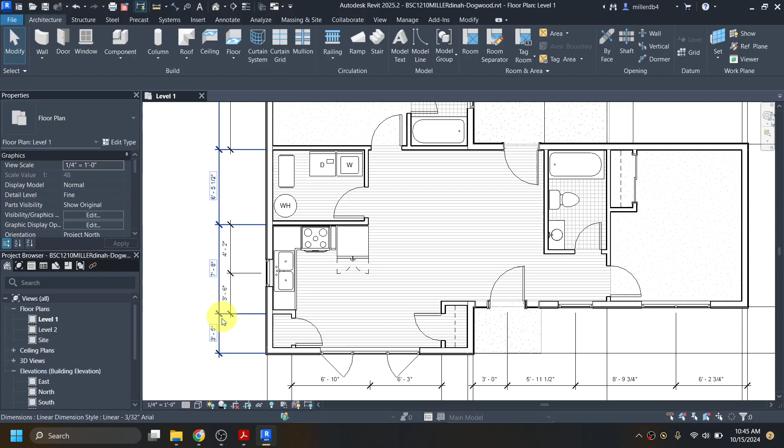One piece I wanted to note before we get into all of that is some of our components may need to be shifted from when we adjusted our dimensions. So you'll notice with my kitchen, mine didn't get all too bad, but my countertop is kind of stuck in this wall and not flush up against this wall, and the same thing with my cabinets. One easy fix for that would be to use the Align tool, which is keyboard shortcut AL, or if you click on anything in your drawing, it'll pop up right here.

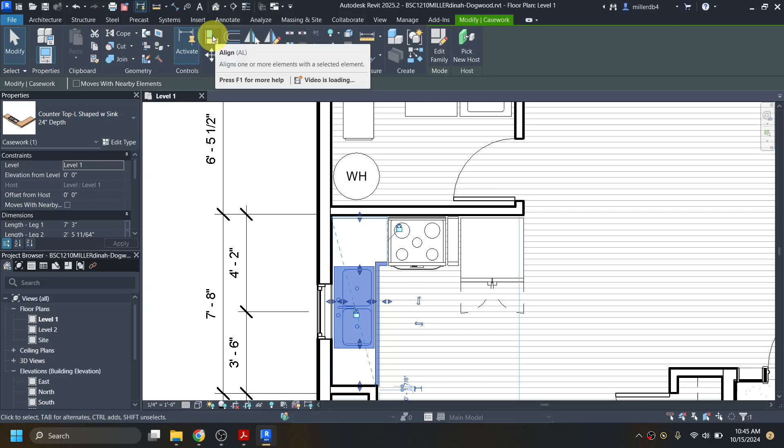I'm going to use AL, click on the wall, then click on the back of that countertop, and it's just going to keep it flush with it. I'll do the same thing with this countertop as well - the wall, then that countertop. And over on this side, the wall, then the countertop edge, just to keep them all flush with each other.

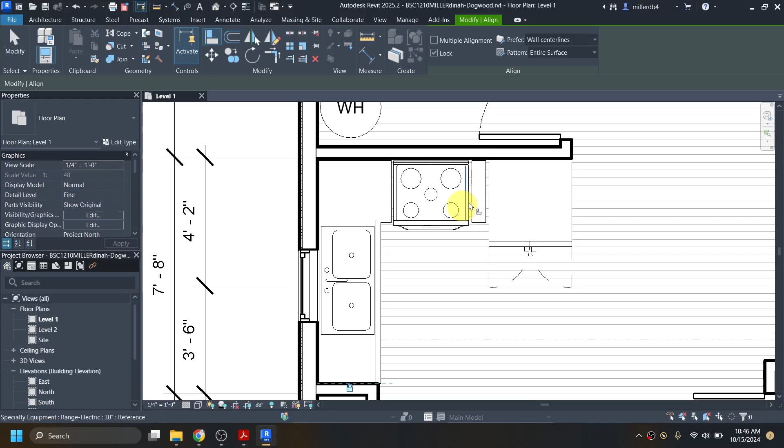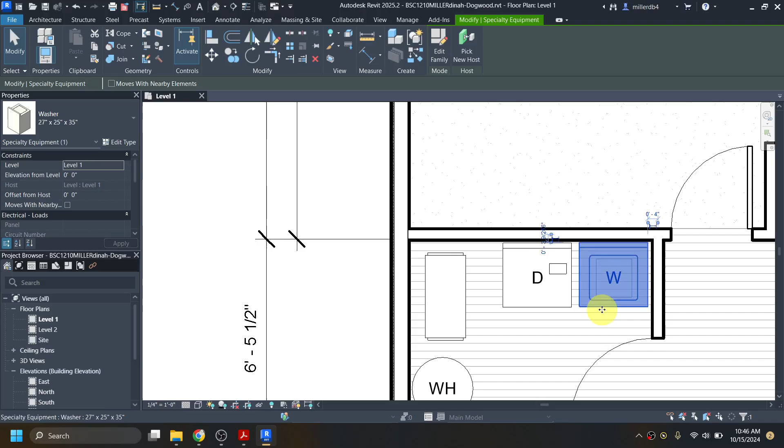Additionally, if I hit escape a bunch of times, we can also use our arrow keys on the keyboard to just move things into place. When you zoom in, it shifts things in smaller increments than when you're zoomed out. So if I move the washer zoomed out, it moves in big spaces, versus if I zoom in, it moves it little by little.

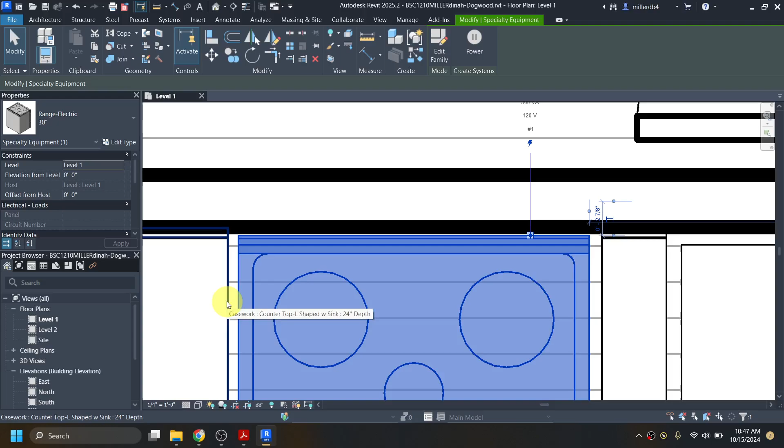With the washer and dryer, there's not really a set space we want to put them in, but things like our countertops, we want those flush up against the wall. Even though the stove doesn't necessarily go all the way up against the wall, I'm just going to eyeball it to be pretty centered here, which seems pretty good. I'll hit escape a couple times.

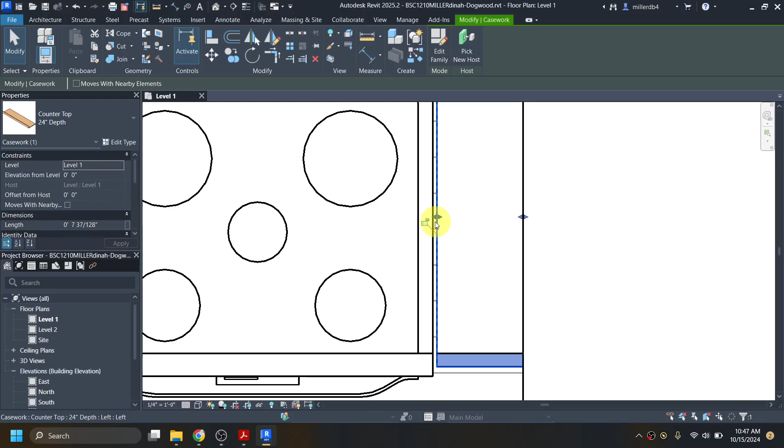I'm going to move this countertop and this base cabinet to just be a little wider too. I probably shouldn't put it right up against it now, thinking back to what I just did to center it. So let's click on it and shift it a little bit more this way. That seems pretty good to me.

Once I've got all of my dimensions and everything placed, the first thing I'm going to do before I make my section is start my foundation. Now, in order to add in a level for the foundation, we need to be in an elevation style view or a section style view - a view that shows a vertical view of the building. We don't have any sections placed yet, so we can't go into one of those.

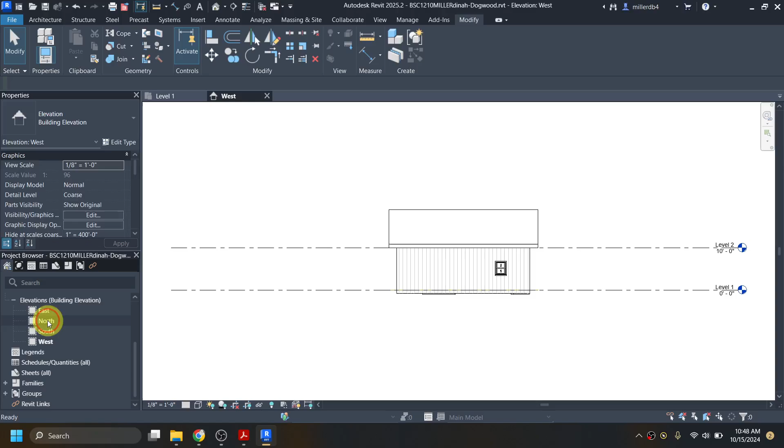To go into one of our elevations, the two ways to get there at the moment would be either to click on any of these arrowheads for our elevation views - if I double click on this arrowhead, it's going to take me into that west elevation. Or I could also come here in my project browser, go to my elevations, and double click. It doesn't really matter which elevation view you're in, you just want to be in one of those elevation views.

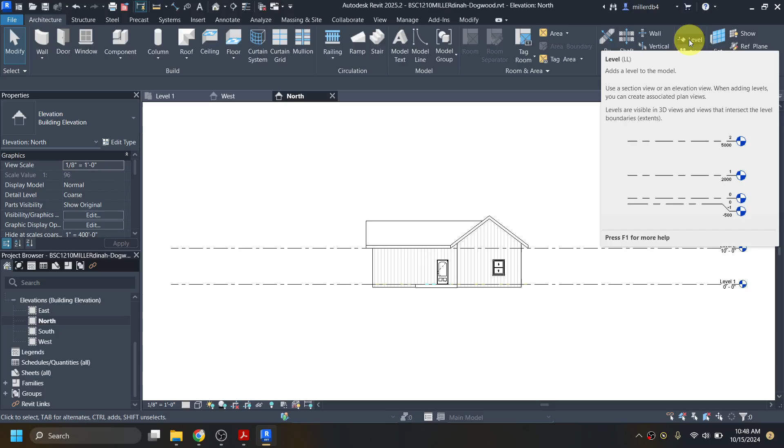Then to add a level, the keyboard shortcut is either LL, or in the architecture tab we have this button right here for adding a level. What I want to make sure it's doing, which mine doesn't seem to be set that way - yours might have this checked off - is we wanted to create a floor plan view for us while we add it in. So I'm going to make sure that create view is checked off. Then I'm going to click just somewhere aligned with the left side of my level heads. Doesn't really matter where or how far down.

So I'm going to click once, and then I'm going to shoot it all the way across until it's aligned up here. So I'm seeing that dashed line.

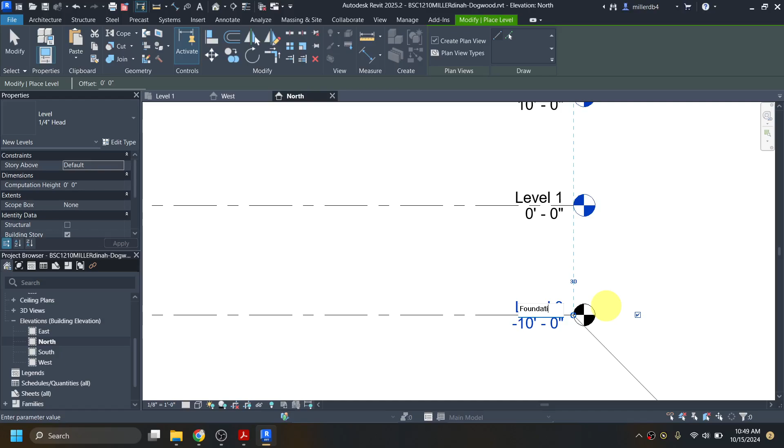Now by default, it called it level 3. I don't like that, so I'm just going to click on level 3 and rename mine foundation because that makes more sense. It's going to ask if I want to rename the corresponding view, so I'll say sure.

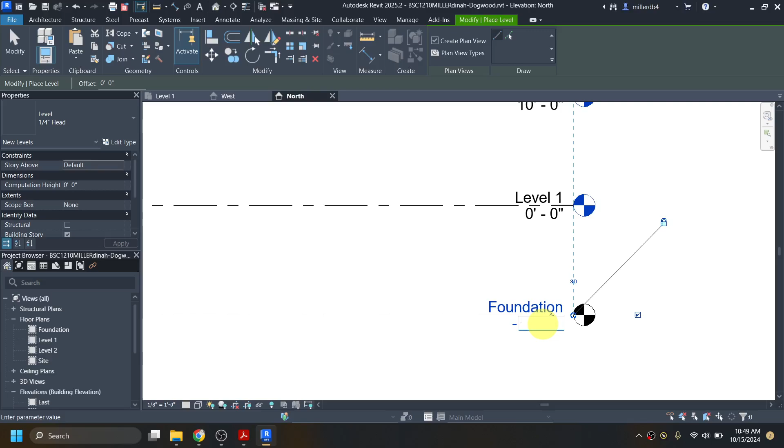And we'll also see over here in our floor plans, it's now made a level called foundation. I'm also going to redo this number from -10. It's not going to matter too much in this project. I'm going to say like -4 feet is how far down I'll put my foundation. And now we have a foundation view.

So I'm going to hit escape a few times. To go into that foundation view, I either can double click on it in my project browser, or I can even double click on this spot elevation and it'll show me my foundation view.

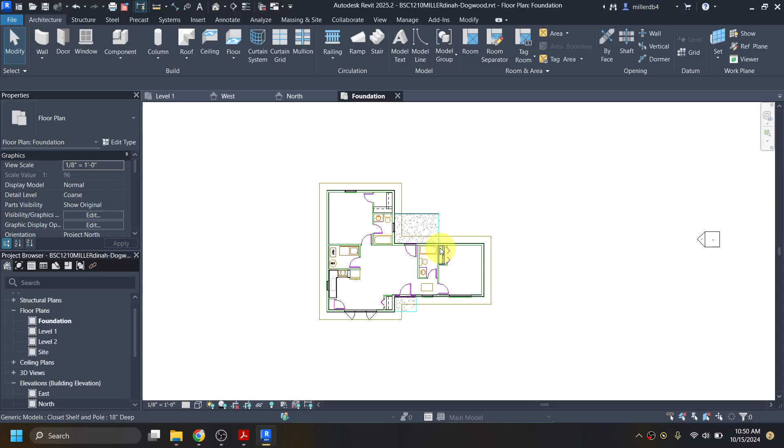So a couple of things we want to adjust within our foundation is we are going to, again, hide our CAD. So I'm going to click on that CAD, right click, hide in view, category, to make it go away. You'll also see it's showing me a lot more than I necessarily want to see in this view. In some ways that's helpful because it'll give us something to trace around for our foundation, and then we're going to adjust some of our visibility for it.

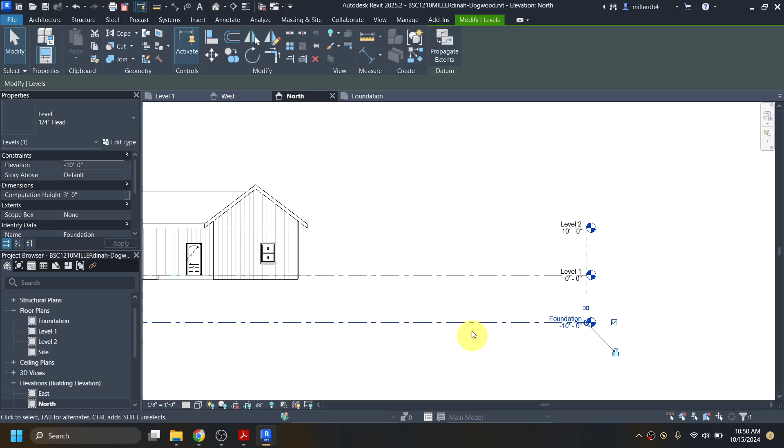Now, if nothing is showing up in yours, it could be the number you have this set at in one of my elevations. So if I have this set at negative 10 feet, when I go into my foundation, which I can get to here, here, or here, nothing's in this view at all. And nothing's in this view because I have my foundation set so far down. I have it set at negative 10 feet, and because my floor plan cut is at 4 feet above that, nothing is showing up, and that's why nothing's showing up here.

So if I wanted to keep it at negative 10 feet, which let's do it for this project, why not? Or if yours is at negative 4, you can keep it there. I'm going to adjust my visual settings.

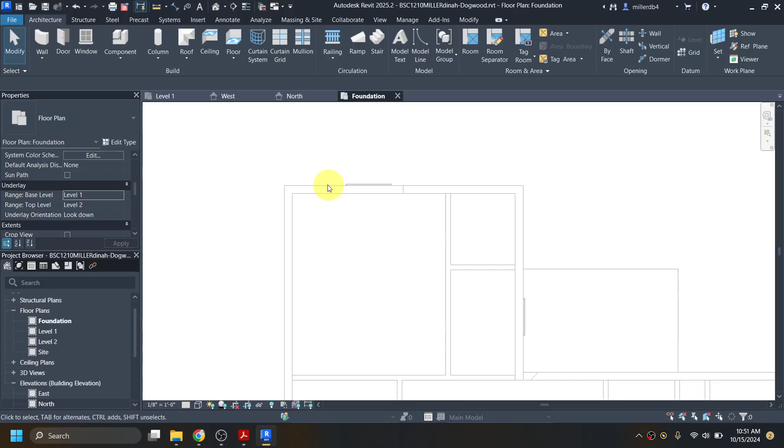And so I'm going to put a base range underlay of, I'm going to say, can you show me level 1? And then just move out of here. This is just going to give me something to trace around when I go to put foundation walls in here.

And so I'm going to start my wall tool for my foundation, which is going to be either just WA or wall right here. And I'm going to make my foundation walls out of this generic 8-inch masonry, because this is essentially a CMU here is what we're looking at.

Now, a couple of other settings I'm going to play around with in here is my location line. Last time we drew based off the center that we were tracing around. This time I'm going to say that I want to do it based on a core face interior. I could be wrong about that. We'll see in a moment.

And for my base constraint, I want it to start at my foundation level, and my top constraint, I want it to go up to level 1.

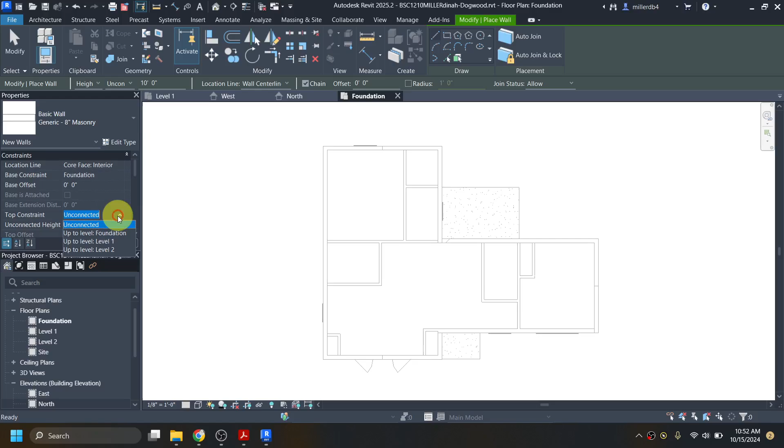Then what I'm going to do is just trace around, which let me hit escape once, because I want it to go to the core face, which I don't know if it's lining up there. I guess we'll find out. I'm just going to trace around to keep it flush with my sides.

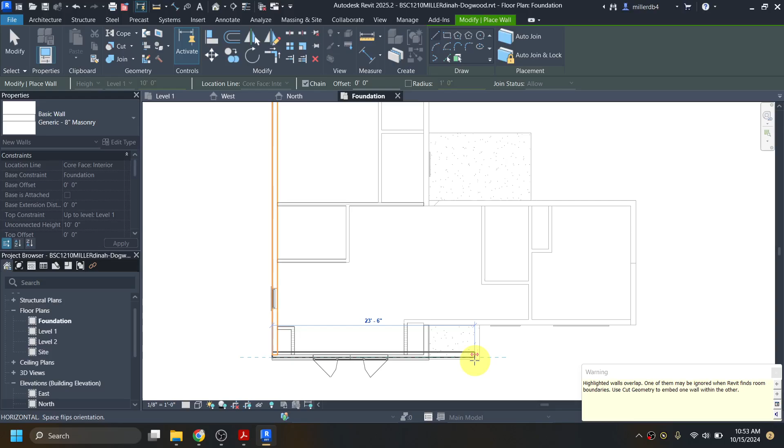And it's warning me that my walls overlap. There we go. Now I see that interior. Whoops, let me hit escape. For some reason, it's not showing me that.

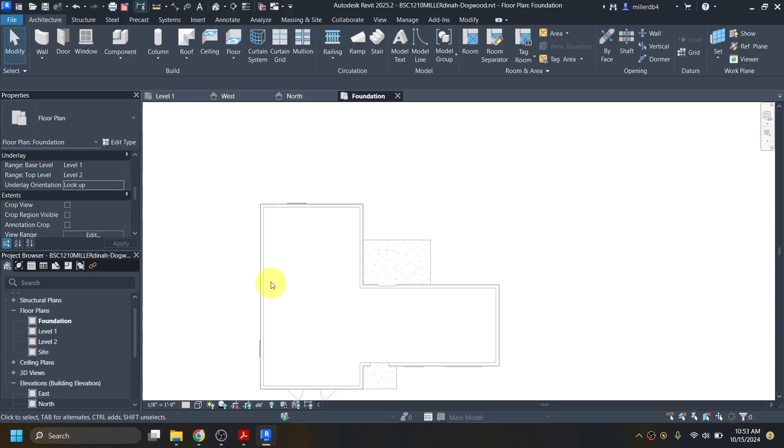What if I do look up for my underlay? There we go. If I change my underlay to look up, now I can see that core face that I want to trace around with. Don't worry about that warning popping up, it's just saying the floor and the walls are kind of glitching or interacting with each other.

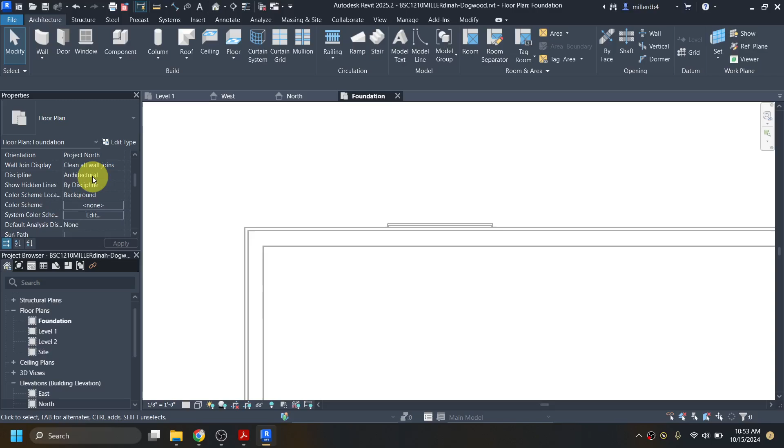If you have that wall here, unfortunately go ahead and just click on it and delete it. Make sure in your settings for your floor plan you've got it set to level 1 and an orientation of look up, because we want to keep it flush with this part of our wall.

I'm going to start the wall tool again and put it on that core face interior. You could also do core face exterior, and then trace around this way. We've got our base constraint of level foundation, our top constraint up to level 1.

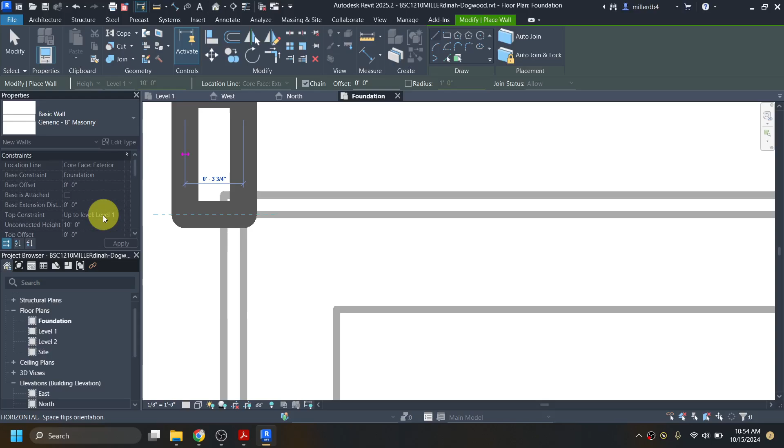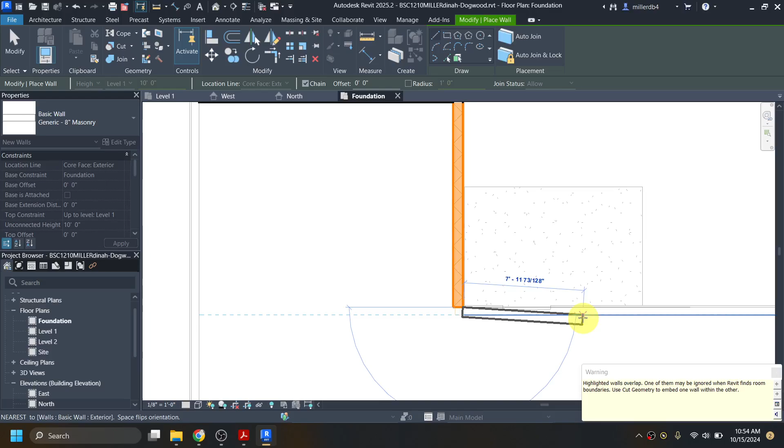We'll click on that corner to start, then go over to this corner. It's going to yell at me, so I'll go again. I'm just going to trace around my whole building, which sometimes requires stopping the tool and starting it again on some corners to make sure it's actually sitting flush. I'm just hitting escape once.

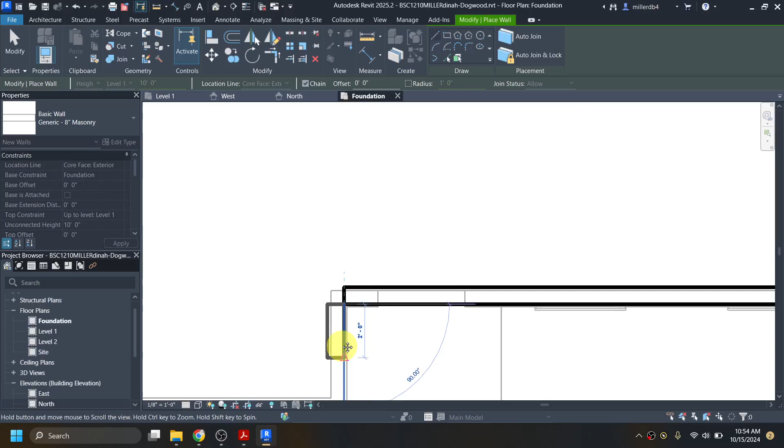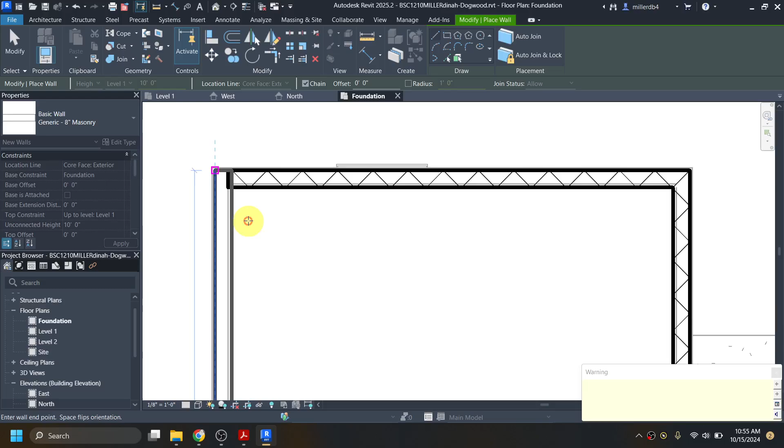These warnings are just letting me know things overlap, we're going to fix that in a minute. Click on that corner, to this corner, this corner, to this one. I'm also going to hit escape a couple of times.

I'm going to extend this foundation wall out, just clicking on that grip and pulling it. Let me click on this one and pull it to intersect as well. The way I think this foundation would be laid out and the way I think the building would get framed would be this part of the building and this part, so I'm making a little choice there.

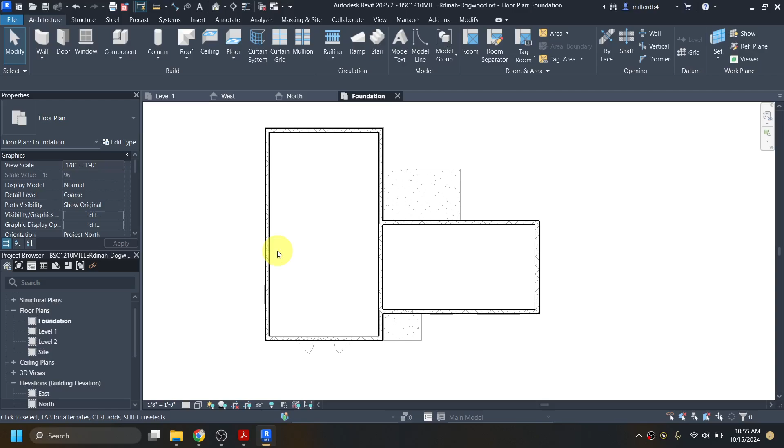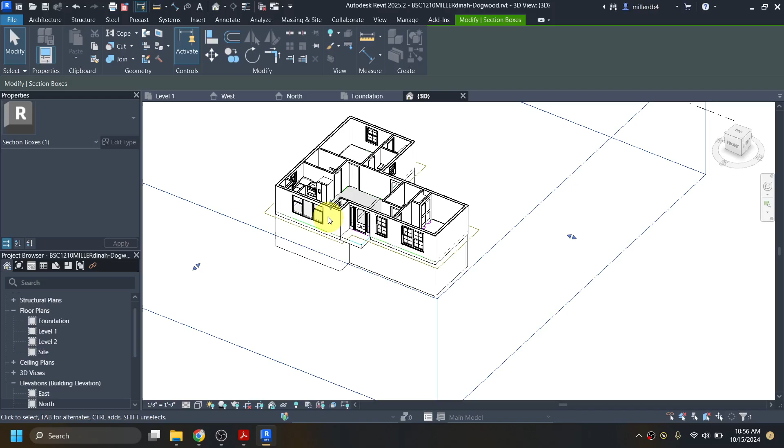Once I've traced around my foundation, I can turn that underlay off. I'm going to scroll down and set my underlay back to none. If I go look at it in 3D, I've got my section box on so only a little part of it is shown, but if I pull that down, we can now see that we have a foundation.

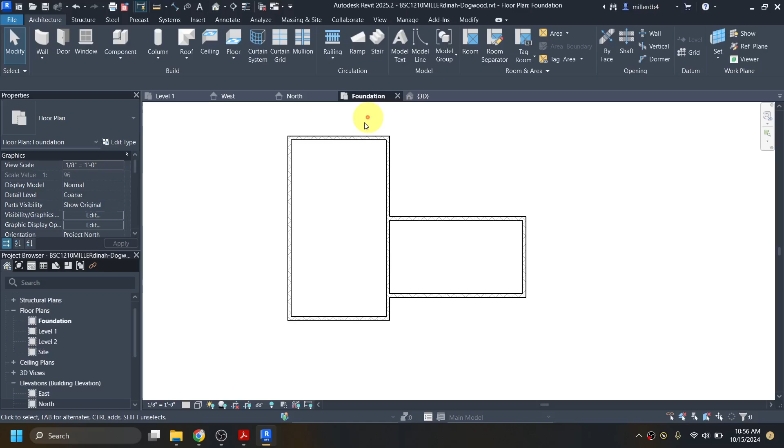What it was warning me about is the fact that these walls here are overlapping with these foundation walls as well. So what we want to do is give a little bit of a top offset for that top constraint. I can do this in the floor plan or in the 3D view. I'm just going to go back into my foundation floor plan, highlight all of these walls, and give them a top offset of -10 inches. Then I'll move my cursor out to apply it.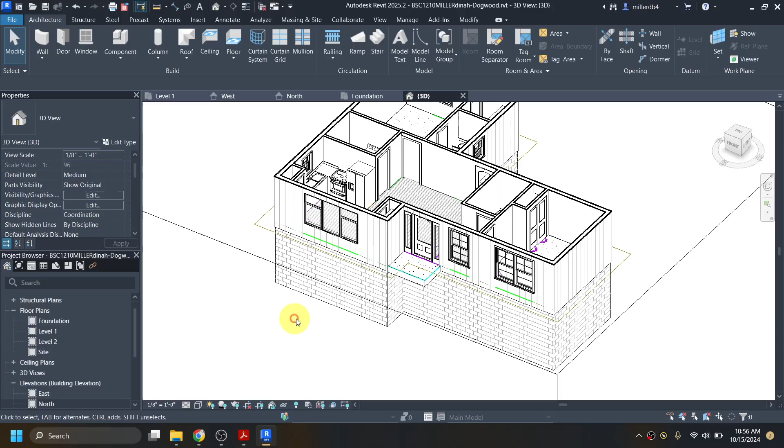If we go look at it in 3D, what it's doing now is essentially having the foundation just sit right underneath where our floor is. We could have applied it beforehand, but sometimes you don't know if that's going to be there or not, so these warnings pop up. We can do things in any sort of order when we're working in Revit, and that's one of the many reasons I really like this software. It does take some getting used to.

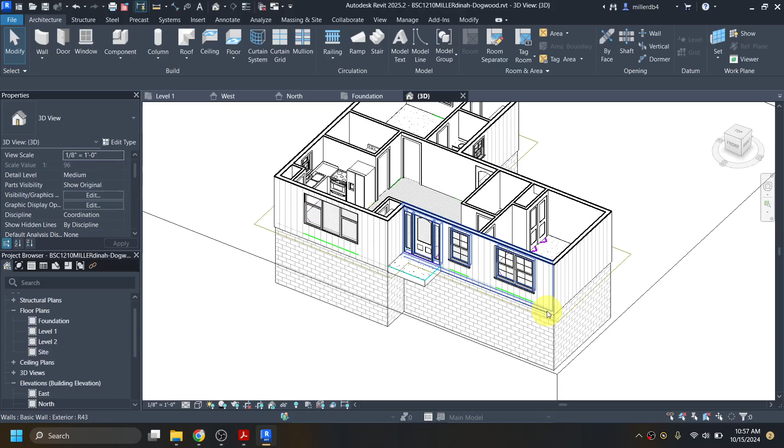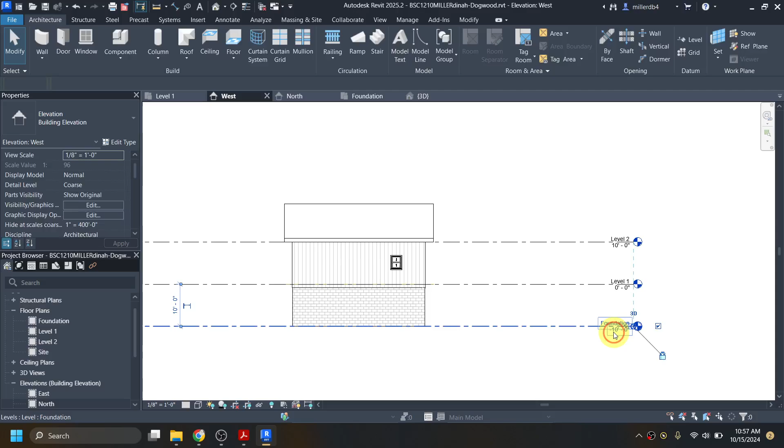Additionally, one cool thing about using the top offsets and bottom offsets - I'm going to go into one of my elevation views. If I did some research and realized my foundation's way too deep and I actually only need like a 4-foot or 6-foot deep foundation, if I change that number to -6 foot, the foundation wall is going to change along with it. Since this is just an imaginary building, we don't really have a foundation depth that we need, but we can change or alter that around.

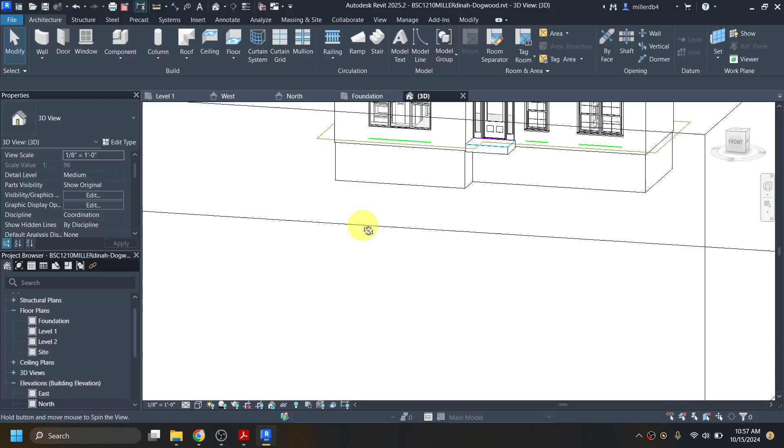I'm going to go back into my 3D view so I can add a footing to all of these walls. To add my footing, I'm going to orbit around to look underneath it, holding shift and the scroll wheel to orbit my building around and look underneath. Then I'm going to use the footing tool. The footing tool is keyboard shortcut FT, or in the structure tab it's this button here. I know it says wall, but it's actually the footing.

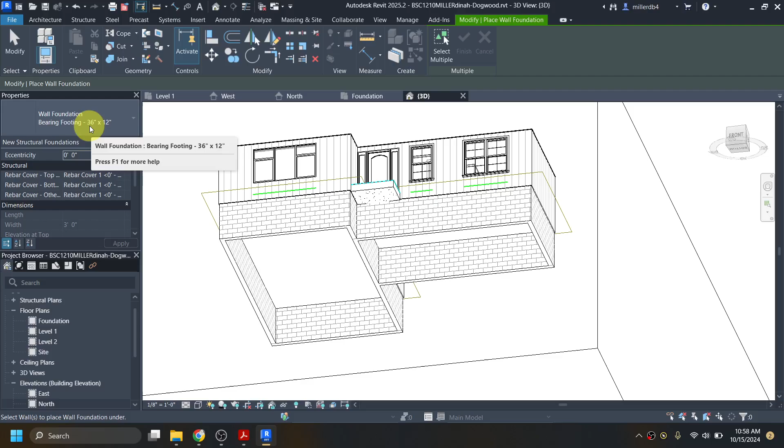By default, it's giving me a 3-foot wide by 1-foot deep footing. I'm going to change it to just be 2 feet wide. So I'm going to go into edit type, and I'm going to duplicate it, because we should always duplicate before we make a change, unlike what I did with the floors in a previous video.

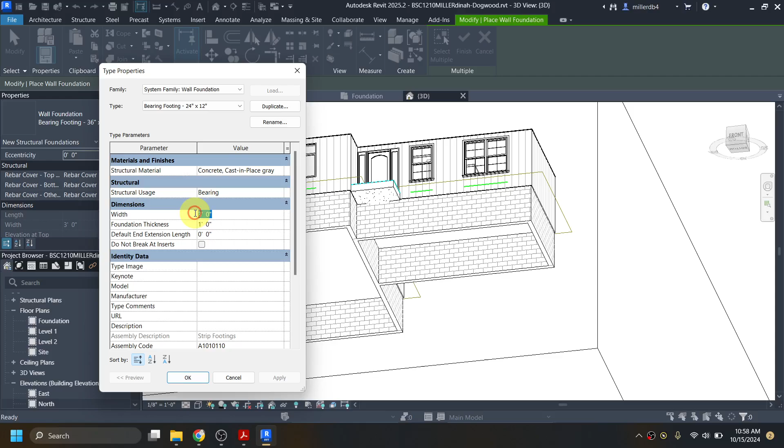I'm going to change its width to 2 feet. To apply it, we're just going to click on each wall we want to put a footing on. I've applied a footing to all of them.

Now if I go into my foundation view, there's a couple of things showing up in here from just where I moved my walls up to 6 feet instead of -10 feet. So there's something showing up in here. Why they're showing up, I'm not sure, but there's a couple of ways we could go fix it.

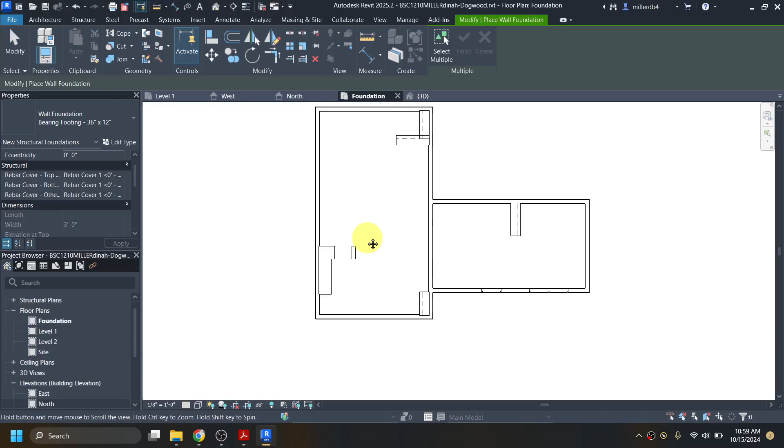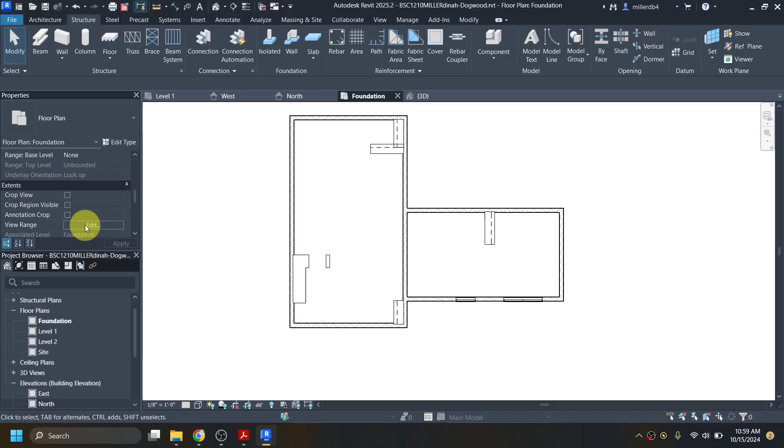The way I would recommend fixing it is also the same way that we're going to get our footing to appear in this view. So I'm going to hit escape about a billion times. And I'm going to scroll down in my properties bar, past the underlay until I see the extents, and I'm going to edit my view range in these extents.

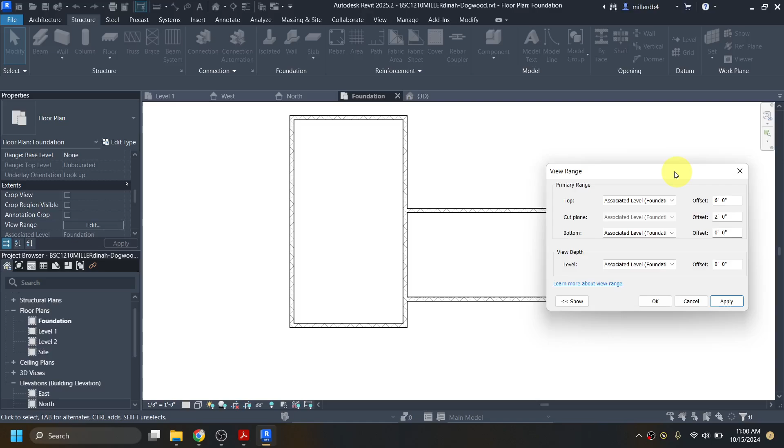So I'm going to click on edit. For my top, instead of it being at 7'6", I'm going to say the top of my wall is at 6 feet. And my cut plane I'm going to put at 2 feet. I'm going to hit apply to see what happens. And you'll see that got rid of all those pieces like the windows and the cabinets and closets - they went away.

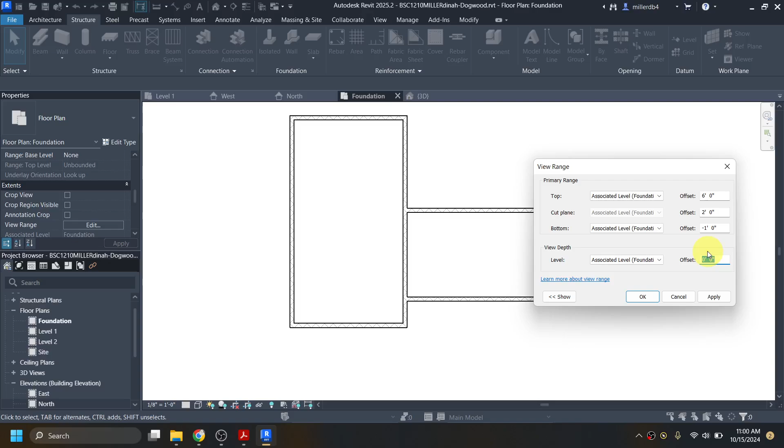To get our footing to appear, we're going to put our bottom at around -1 foot. Let's try. Before we hit apply, we also need to change this depth - these two numbers have to match. Now I'll see too that my footing appeared in here. So that's great. I'm going to click OK.

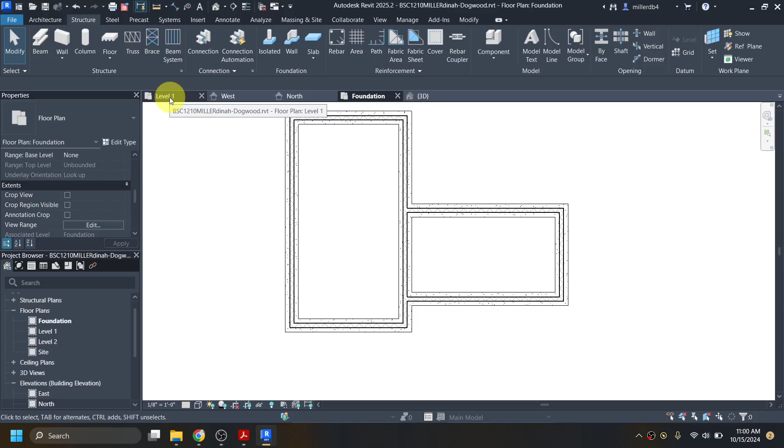Then the next thing we're going to do in this video is create some section cuts. We're going to make 2 section cuts. I find the best way to make a section cut is to do it from a floor plan style view. So in my floor plan view, back in level 1, you can either click here or click here - there's no real rhyme or reason for how you get into it, or no correct way.

The 2 ways you can create a section cut are: you can either use the shortcut button here, or you can go into your view tab and there's a button here for it. I'm just going to use the shortcut option. When we go to make a building section, you're essentially going to say where do you want that cut to start and where do you want it to end. So we're going to make 2 clicks to just make a line to slice the building open.

If you don't place it in the perfect spot, that's fine because you can change it after the fact. So I'm just going to click over here to start and then click over here to end it. And it's made a section cut through my whole building. I want it to go through that door, so I'll try to center it through that door as well. I'm just going to use the arrow keys on my keyboard to kind of shuffle it through.

I have it facing this direction towards the bedrooms. If I wanted to flip it, I can just use that to flip which way it's going.

The other thing you want to pay attention to within these views is its view range. Sometimes students will say that pieces are missing or disappearing, and that's because if I wanted this back door to show, I need to make sure that this box is going through it. So if your view range is only going to be tiny like that, we're just going to drag it out to be here.

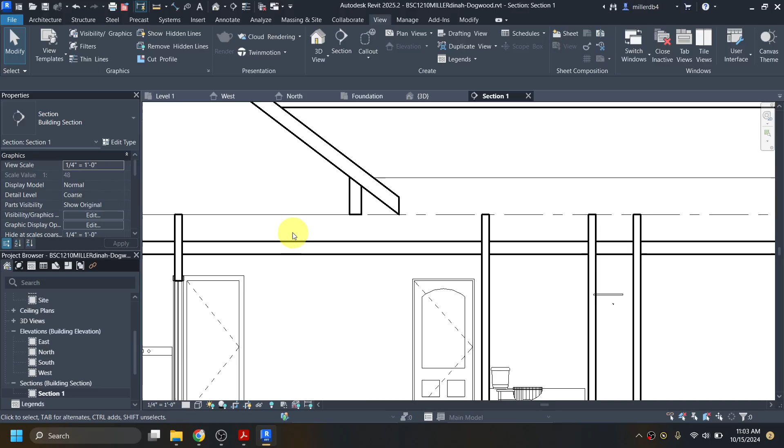The first thing I'm going to do is align these walls with the ceilings I've placed. I'm going to use align, keyboard shortcut AL, or you can click on anything and then it's this button here. I want the ceiling and the top of this wall to sit flush, the ceiling and the bottom of this wall to sit flush, ceiling and this wall, ceiling and this wall, ceiling and this wall. That seems good for our align tool.

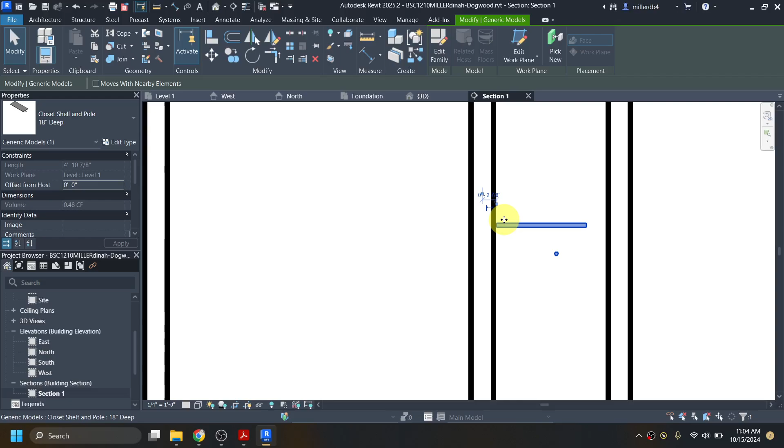There's also something I noticed real quick, so let me hit escape a couple of times. This closet shelf is awkwardly sticking in there, so I'm going to use my arrow keys to bump that shelf out. This bathtub is also kind of stuck in the wall, and that's just from when I moved and adjusted parts of my building around, so some pieces got awkwardly stuck.

The next thing I'm going to do is join all of this geometry together in my building. To get to the join geometry tool, it doesn't have a keyboard shortcut, but again if you click on anything at all, it opens up this modify bar, and it is this button here. I'd recommend setting a keyboard shortcut for join geometry because we use it so often.

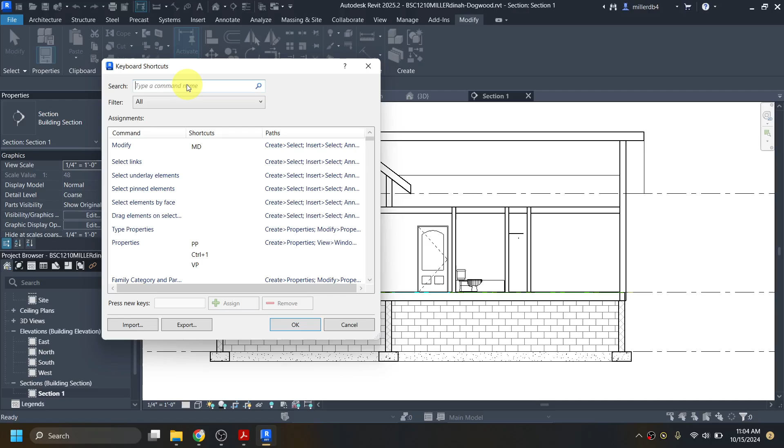To set a keyboard shortcut, hit escape a bunch of times and use the keyboard shortcut KS to open up your keyboard shortcuts. If you type 'join' up here, join geometry, you'll see I've already applied a keyboard shortcut to it of JG. So you can just come down here and click assign for it.

The way the join geometry tool works is if you click on it here, you'll see that icon pop up next to it. Or if I hit escape a bunch of times and use JG, you'll see it also pops up. You click on the two pieces you want to join. So I clicked on my roof and then my wall, and you'll see it just joined the two of them together.

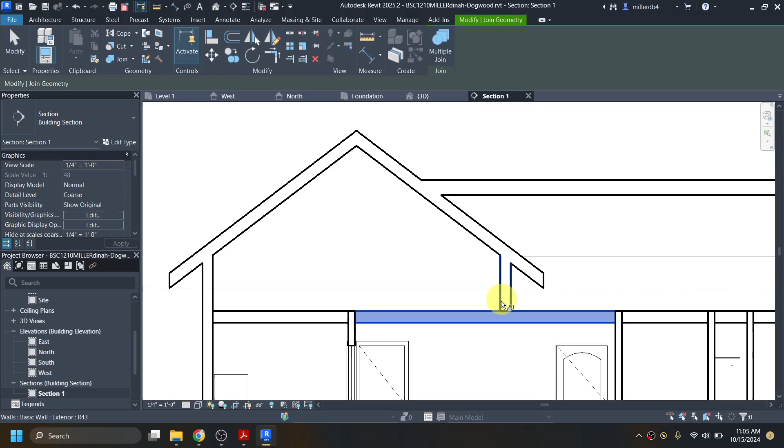I'll click on the roof and it joins them together. The roof and this wall, the ceiling and this wall, the ceiling and this wall, the ceiling and this wall. I'm just going to go through and join all of it together until it can all be one piece. Essentially, if I used the hatch tool in AutoCAD, would it just fill this whole thing in?

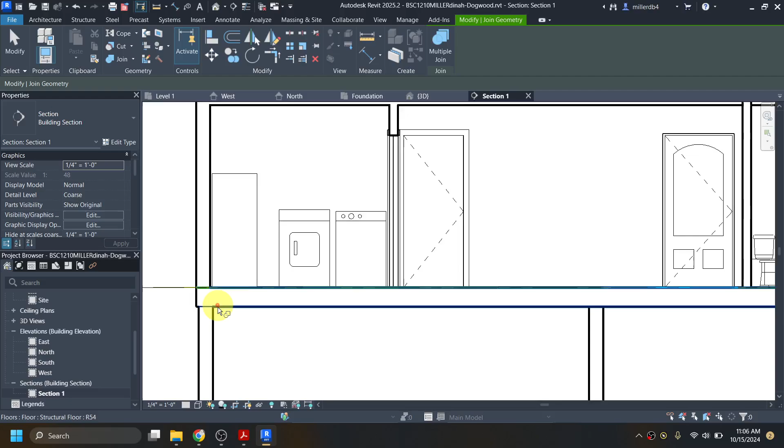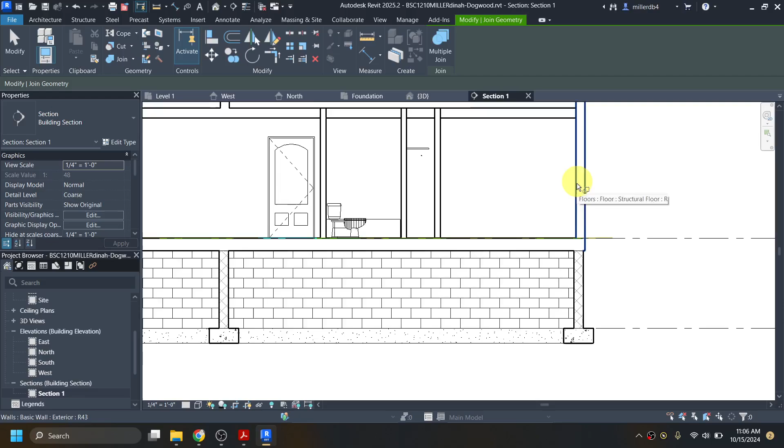So I'm going to join the wall to the floor, the foundation to the floor, the foundation to its footing, foundation to its footing, foundation to the floor. I'm just clicking to add everything together. The floor to this wall, the floor to this wall, the footing to the foundation to the floor to the wall. I want it all to be one piece.

It's just a lot of clicking until it's all one connected piece going around. Then I'm going to hit escape a billion trillion times.

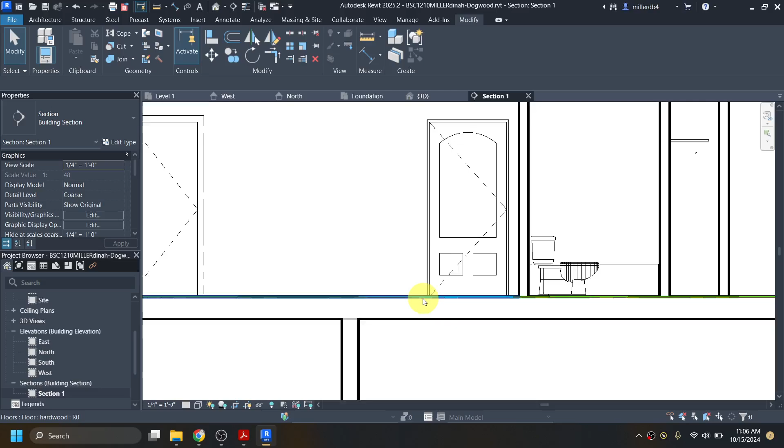One thing you'll notice is our CAD drawing is still kind of showing up in here, so we need to turn its visibility off. That's keyboard shortcut VG. Then we'll go into imported, and I'm just going to uncheck the CAD drawing to hide it. And then we're also going to want to adjust our detail level for something like a section cut.

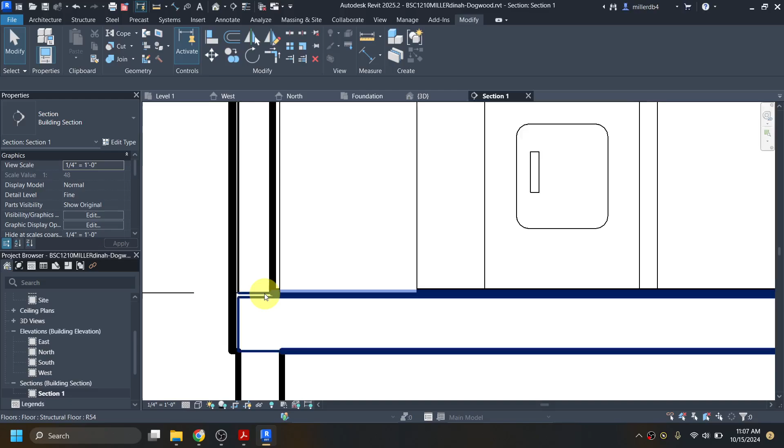So I'm going to change my detail level to fine, and you'll see then that it'll show things like our subflooring and how everything's getting built and attached together. Let's make one more section view as well, just to get some practice in with our sections.

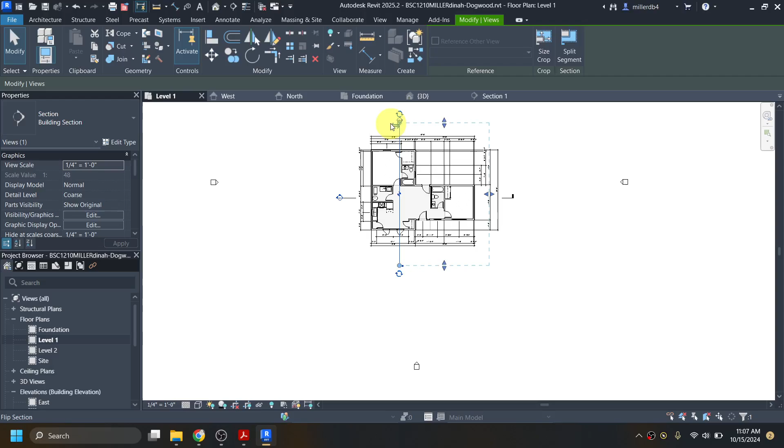I'm going to go into my level 1 floor plan and do a section cutting through the building this way, using my section tool up here. I'll click where I want it to start, click where I want it to end. If I want it facing the other way, I can use these arrow keys to flip it around.

And if I also wanted to move these section heads up or down, I can move them. I can break that section apart and just pull it out.

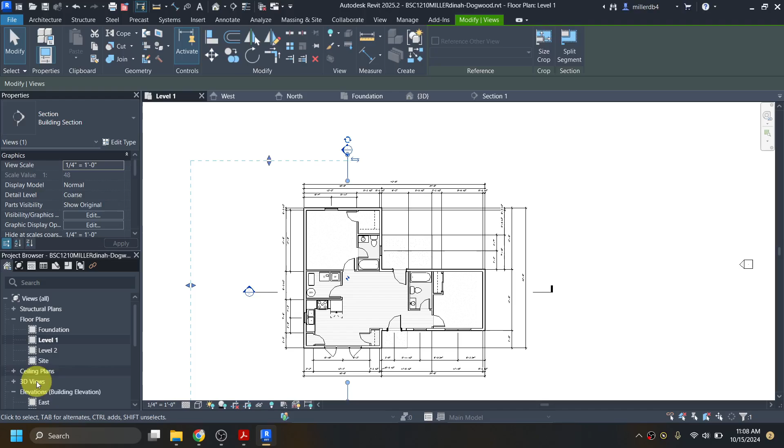And then if I want to go into this section view to look at it and clean it up if it needs any cleaning, I'm going to use my arrowheads just to shuffle it over a little bit. I want it going through that door a little better. Then to go into this view, I could double click on the section head, or I can go into my browser and open up section 2.

So a few things that need to get cleaned up in here, just like with our other one, is we're going to do some align for our walls so they sit flush with where our ceiling sits. I'm going to use AL.

Sure, I'll save my project. I'm going to click on the ceiling and then the top of this wall, ceiling, top of this wall hanging out behind it, ceiling, and then the top of this wall, ceiling, and the top of this wall. And then I'll use my join geometry tool to bring all the pieces together.

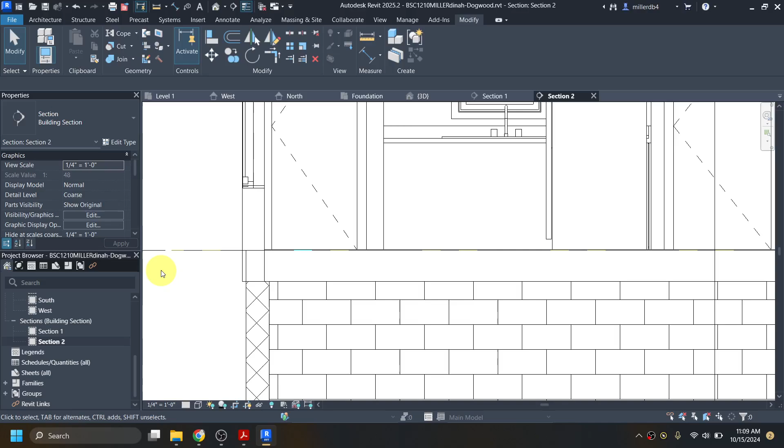One thing is if you have thin lines currently turned on, which again is TL, that hides line weights, but it also makes joining geometry a little bit harder. So TL is thin lines, or this tool here. You're going to want to make sure you have line weights visible. It just makes it easier.

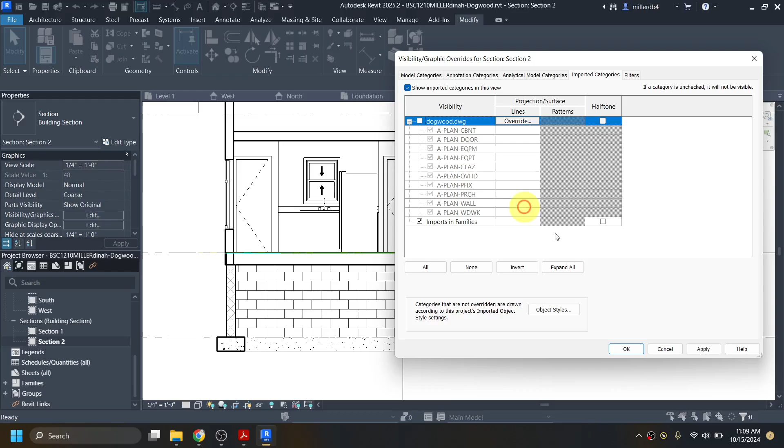Our CAD drawing is also still kind of visible or present, so let's go into VG and then imported categories just to turn it off. Really, I guess we could delete it at this point, but I just don't want to delete it just yet. I always prefer to have it there just in case I might need it.

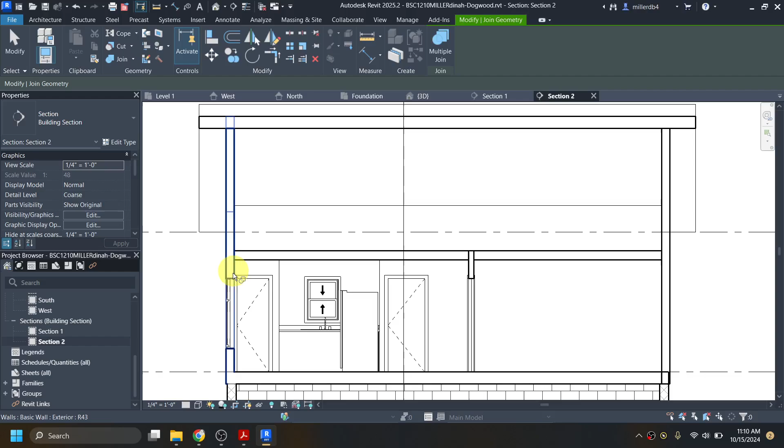Then I'm going to start join geometry, which again is in the modify tool tab, and then this button or keyboard shortcut JG that we just made. I'm going to do my footing to my foundation, to my floor, to my wall, my wall to my ceiling, my wall to my roof.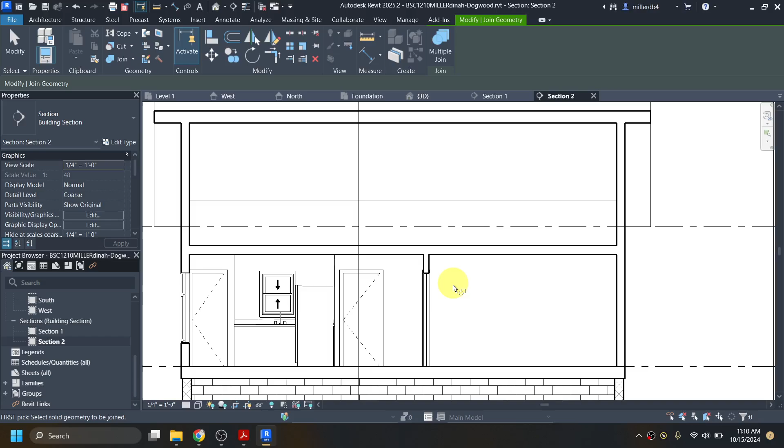Footing to foundation, foundation to floor, floor to wall, wall to ceiling, wall to roof, and then we also have the ceiling to this wall to this ceiling. Floor to wall, though we're not really going to see it much, purely because of the fact that there is that door. So we won't see that connection the way we typically would where we have a wall going through. Sort of like with this one, though I don't think I did join those together.

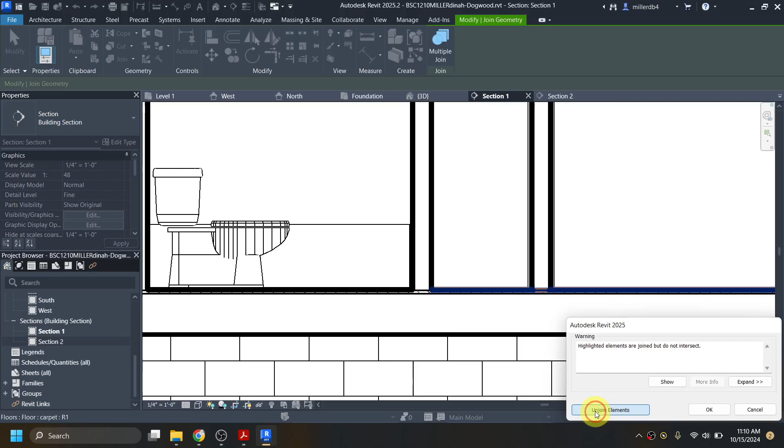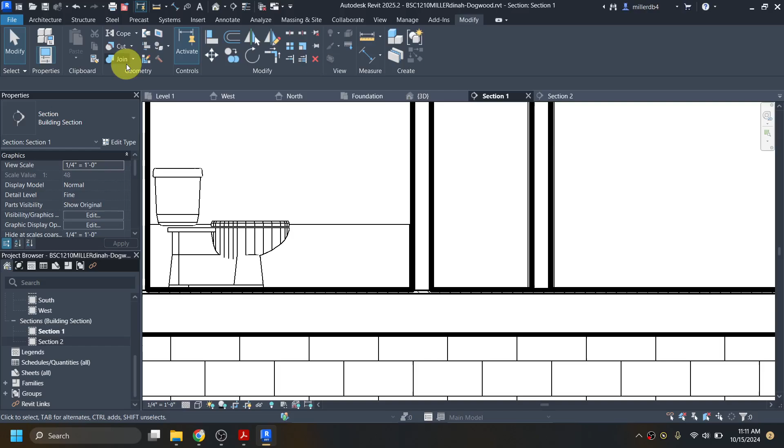Let's try unjoining geometry in this part, and then let's try joining geometry again.

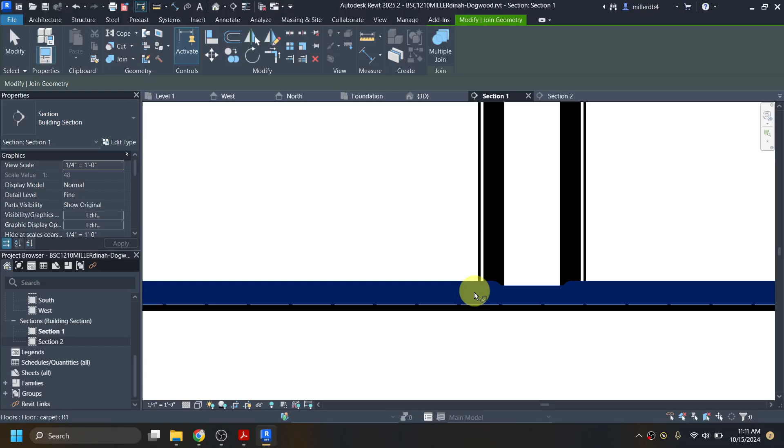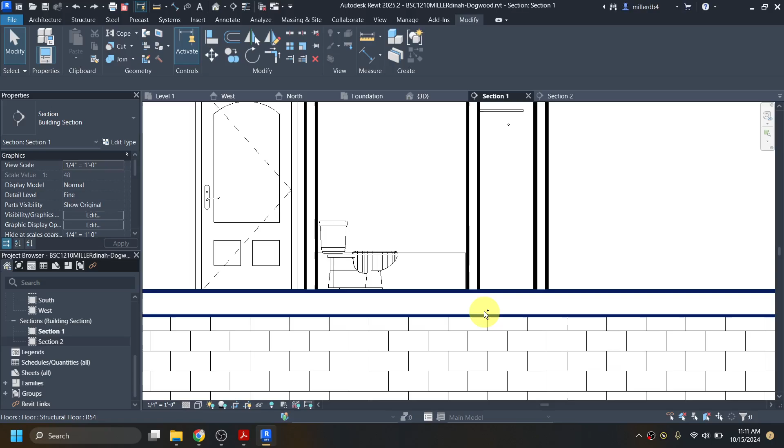I think it's just because of the way I did my floor that one's coming out that way. There we go. Now it seems that one went away. I'm just going to Control Z and leave that be. I unjoined stuff up here. I just made a bigger mess than I needed to make.

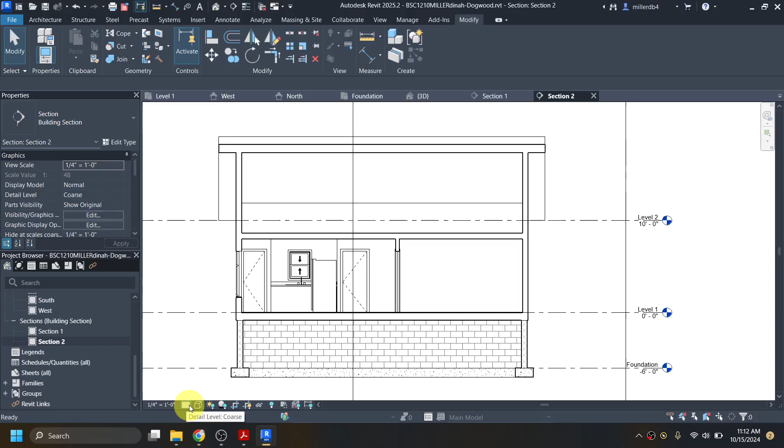Let me go back into section 2, but this one, because there's that door there, it's not going to show up the way we typically would see it. Let's up our detail level, so that's this button here, to fine. And now we've got some building sections made, as well as our foundation.

In our next video, which is also going to be our last video, we're going to go over rendering and then setting up these views and viewports in our paper space or our sheets.